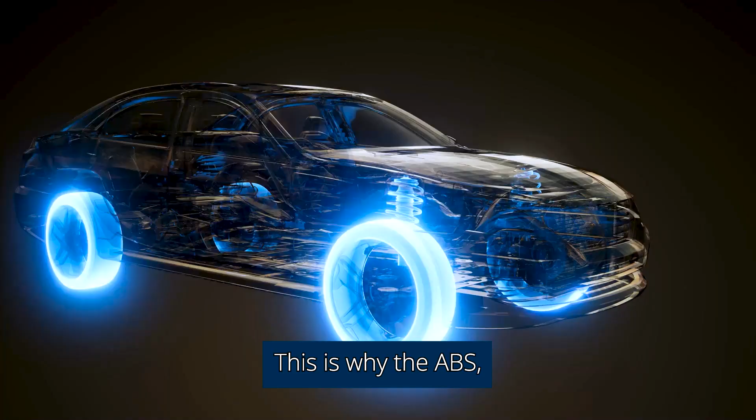When you're learning to ride a bike, the first thing you learn is how to brake. Brakes are arguably the most important part of your car. If they fail, it can easily turn fatal. This is why the ABS, or anti-lock braking system, is so important. And the ABS module monitors that system.

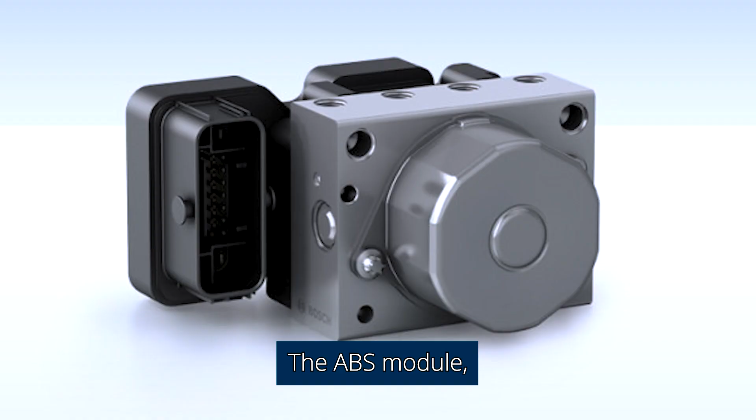What is the ABS module? The ABS module, also known as the anti-lock braking system module, is a critical component in a vehicle's ABS system. The ABS system is designed to prevent the wheels from locking up during braking, which helps maintain steering control and stability, especially in slippery conditions like wet or icy roads.

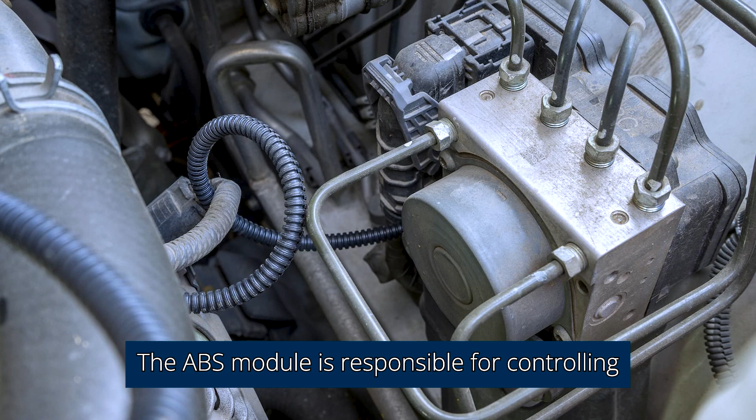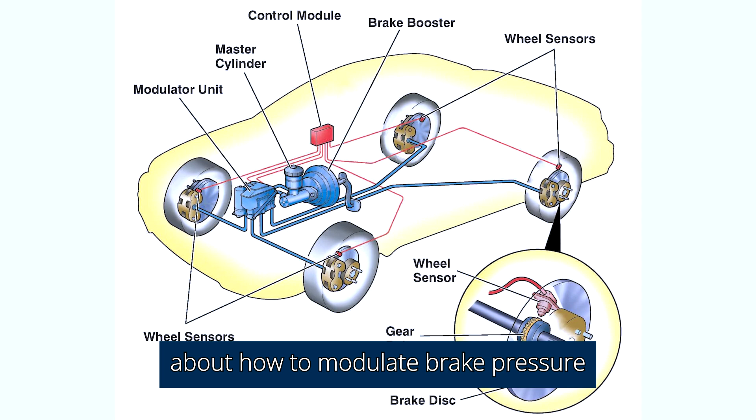The ABS module is responsible for controlling and coordinating the ABS system's various components. Here's a brief overview of the ABS module's functions and components. Number 1. Control unit. The ABS module contains a control unit that processes data from various sensors and makes decisions about how to modulate brake pressure to prevent wheel lockup. It uses this information to adjust the brake force on individual wheels as needed.

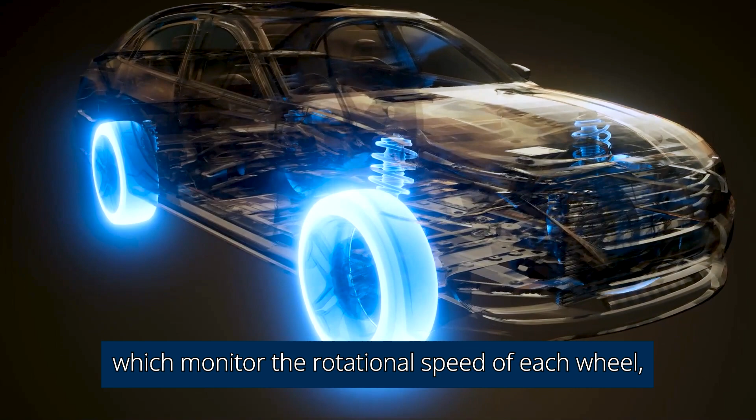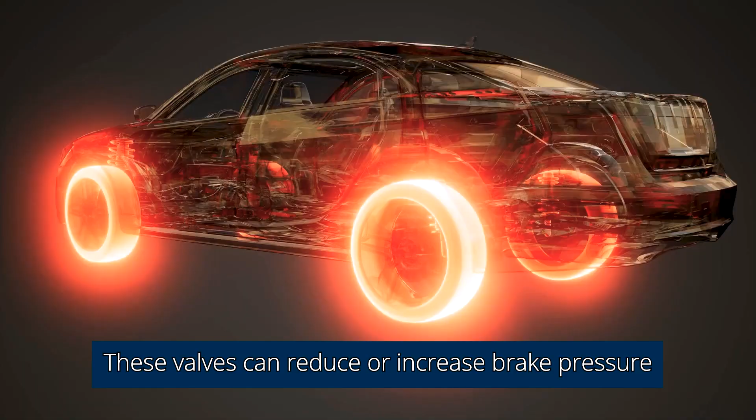Number 2. Sensors. The ABS system relies on sensors to detect wheel speed and other factors. Commonly used sensors include wheel speed sensors, which monitor the rotational speed of each wheel, and sometimes other sensors like the brake pedal position sensor. Number 3. Hydraulic valves. The ABS module controls hydraulic valves in the brake lines of each wheel. These valves can reduce or increase brake pressure on individual wheels to prevent them from locking up.

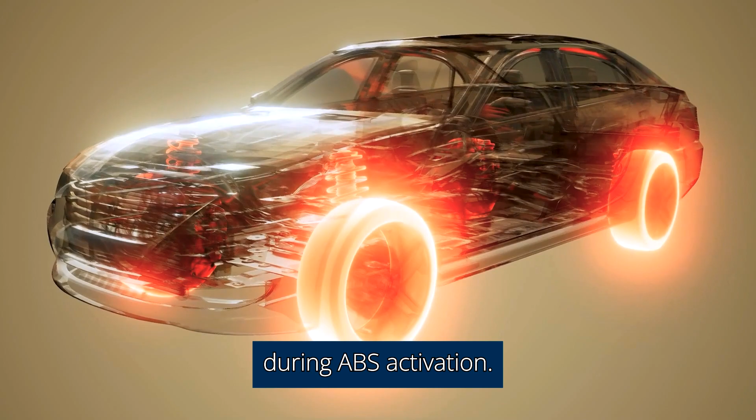Number 4. Pump motor. The ABS module also contains a pump motor, which pressurizes the brake fluid in the system as needed. This helps with rapid brake pressure adjustments during ABS activation. Number 5. ECM/ECU integration. In many modern vehicles, the ABS module communicates with the engine control module, ECM, or engine control unit, ECU, to optimize ABS system performance based on various factors like engine speed and throttle position.

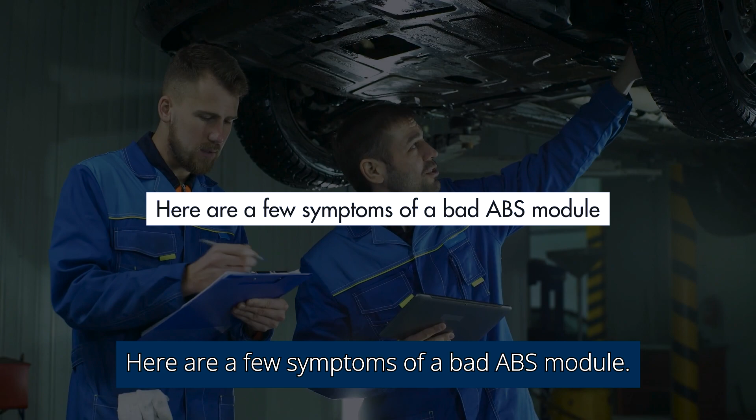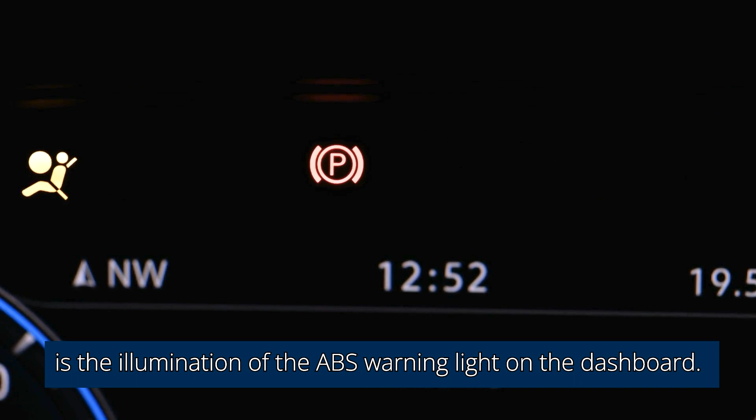Symptoms of a bad ABS module. So how do you know if this important monitoring system is failing? Here are a few symptoms of a bad ABS module. Number 1. Illuminated ABS warning light. One of the most noticeable signs of a bad ABS module is the illumination of the ABS warning light on the dashboard. When the ABS module detects a problem or malfunction within the ABS system, it triggers the warning light to alert the driver. This light stays on as long as the issue persists.

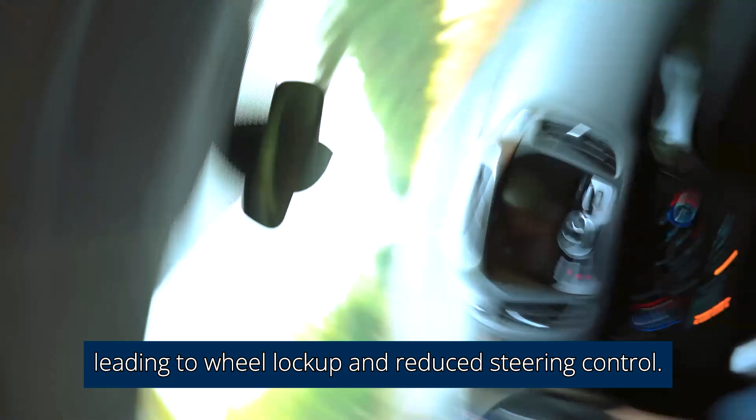Number 2. Loss of ABS functionality. A failing ABS module may result in a loss of ABS functionality. When you apply the brakes in slippery or emergency conditions, the ABS system may not engage properly, leading to wheel lockup and reduced steering control. This can result in longer stopping distances and can threaten safety in bad road conditions.

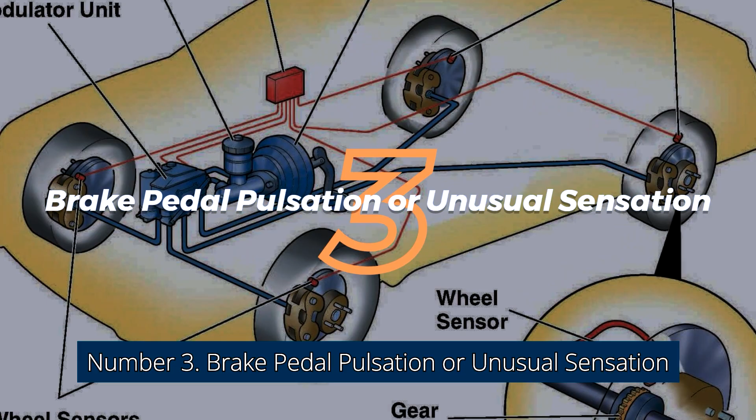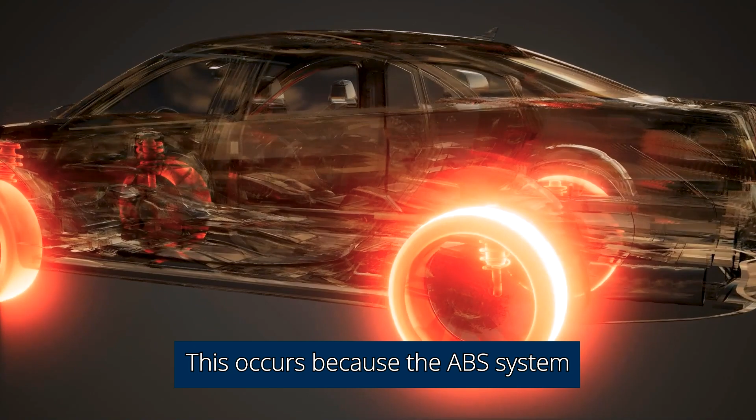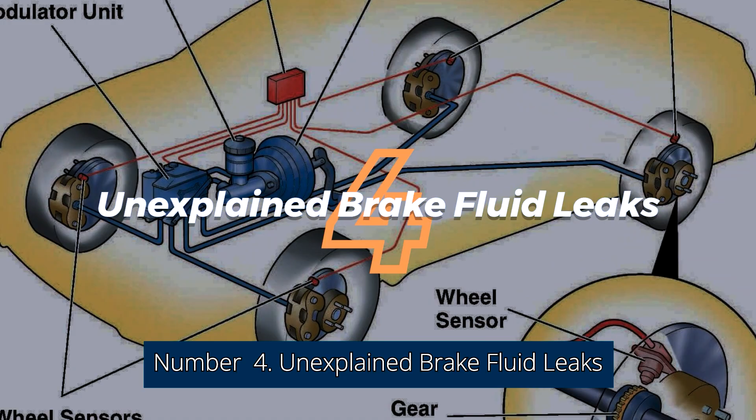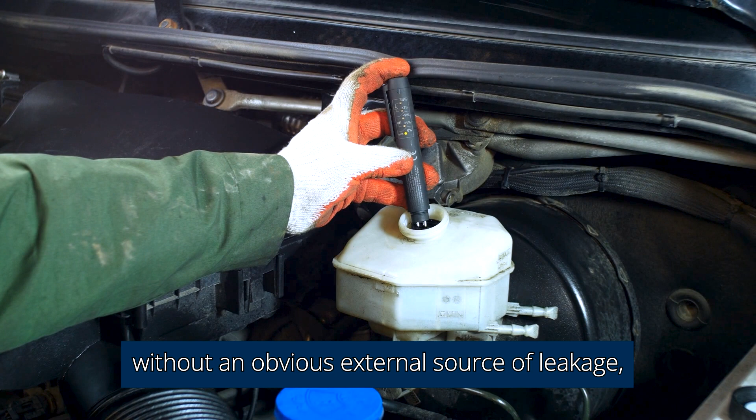Number 3. Brake pedal pulsation or unusual sensation. In some cases, a bad ABS module may cause the brake pedal to pulsate or provide an unusual sensation when braking. This occurs because the ABS system is not functioning correctly, and the module may not modulate brake pressure as it should, leading to inconsistent braking. Number 4. Unexplained brake fluid leaks. A malfunctioning ABS module can sometimes cause brake fluid leaks. If you notice a decrease in brake fluid levels without an obvious external source of leakage, it could be a sign that the ABS module's internal seals have failed, allowing brake fluid to escape.

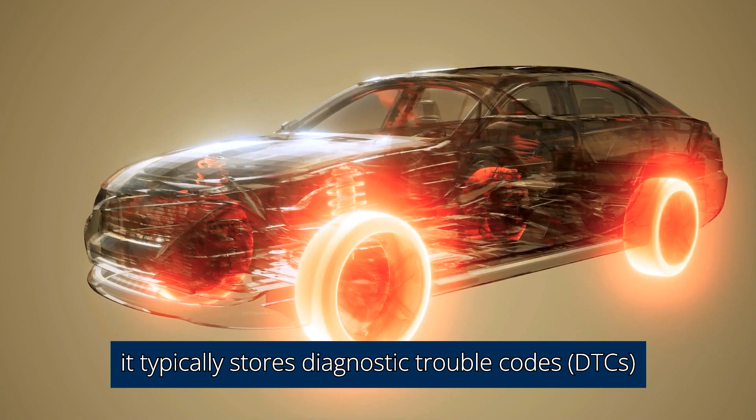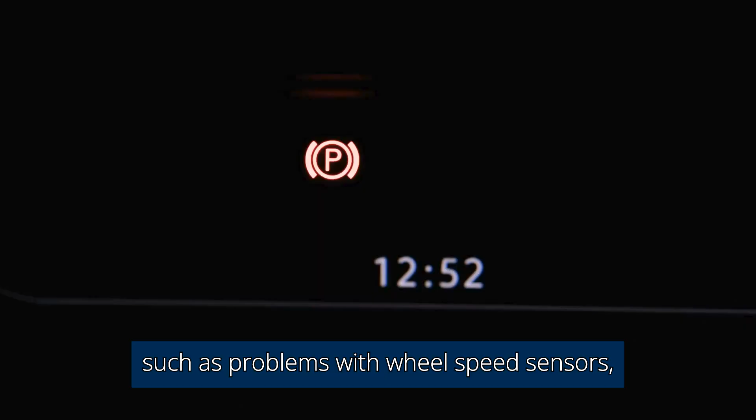Number 5. Diagnostic trouble codes, DTCs. When a bad ABS module triggers the ABS warning light, it typically stores diagnostic trouble codes, DTCs, related to the specific issue. These codes can be read with a diagnostic scanner. It's important to note that the symptoms of a bad ABS module can overlap with other brake system issues, such as problems with wheel speed sensors, brake fluid levels, or the ABS pump. If you experience any of these symptoms, it's advisable to have your vehicle inspected by a qualified mechanic.

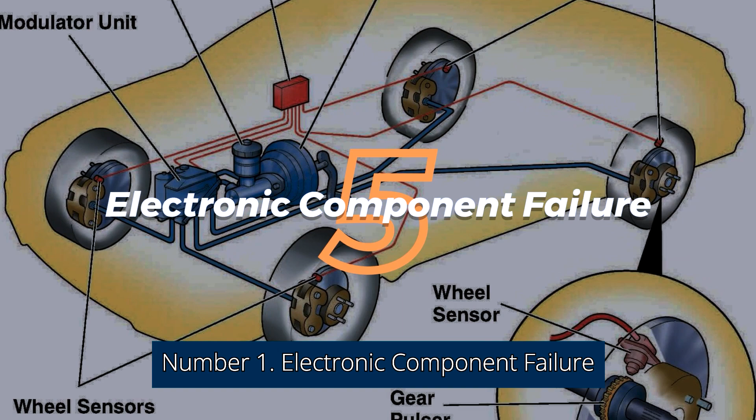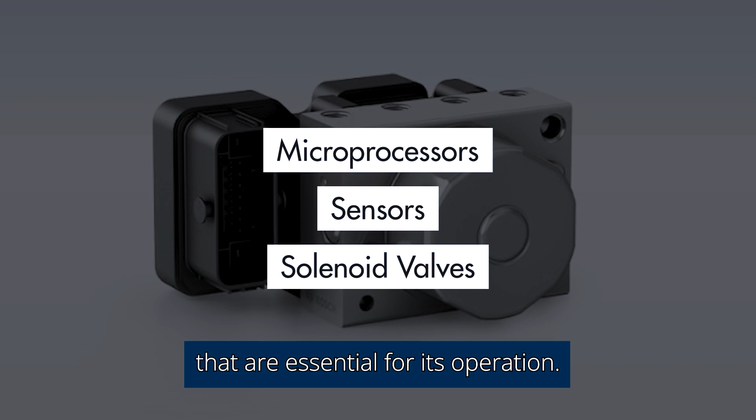Causes of a bad ABS module. Why do ABS modules fail? Usually, it's for one of 3 reasons. Number 1. Electronic component failure. The ABS module contains electronic components, such as microprocessors, sensors, and solenoid valves, that are essential for its operation. Over time, these electronic components can wear out or become damaged due to factors like heat, moisture, or electrical surges. When these components fail, they can disrupt the communication and functionality of the ABS module.

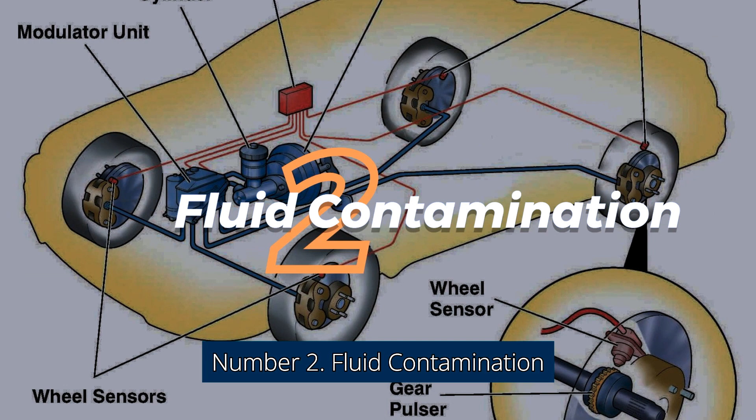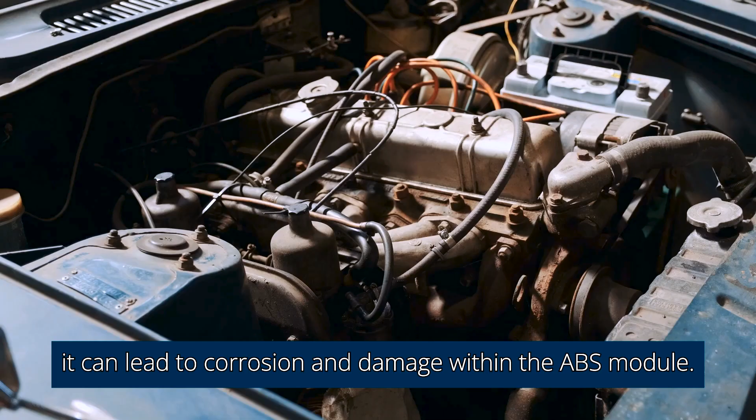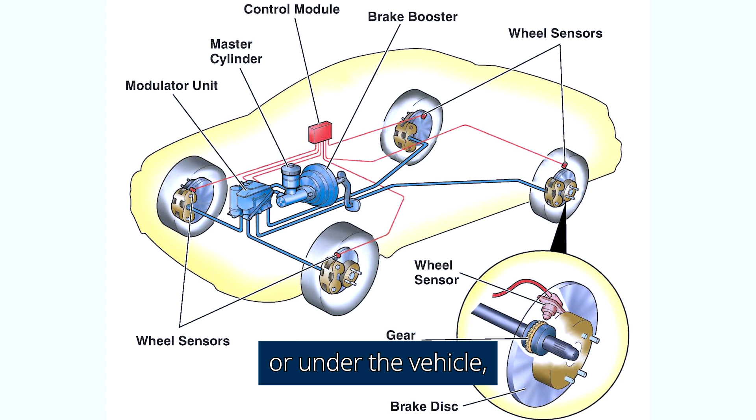Number 2. Fluid contamination. The ABS system relies on clean and uncontaminated brake fluid to operate correctly. If the brake fluid becomes contaminated with moisture, air, or debris, it can lead to corrosion and damage within the ABS module. Number 3. External damage or physical impact. The ABS module is typically located in the engine compartment or under the vehicle, making it susceptible to physical damage from road debris, collisions, or other external factors. A direct impact or damage to the ABS module can result in internal damage to its components, leading to a malfunction.